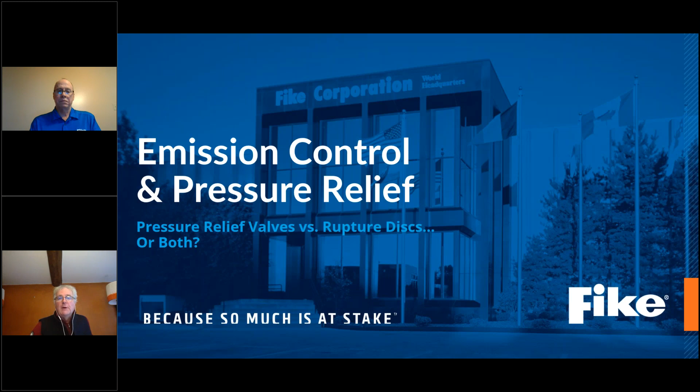A few weeks ago, we had the COP27 summit discussing the climate crisis, highlighting the need for industries to reduce their emissions of greenhouse gases. Control and reduction of emissions is now taking center stage.

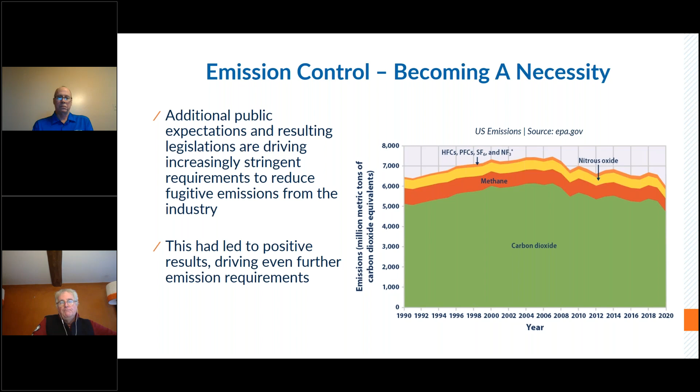In the case of the hydrocarbons and CO2 emissions, phasing out is not really an option in the short term. However, the chemical, petrochemical and process industries have a vested interest in reducing wasteful and harmful emissions from the production process, and much effort is already given to reduction.

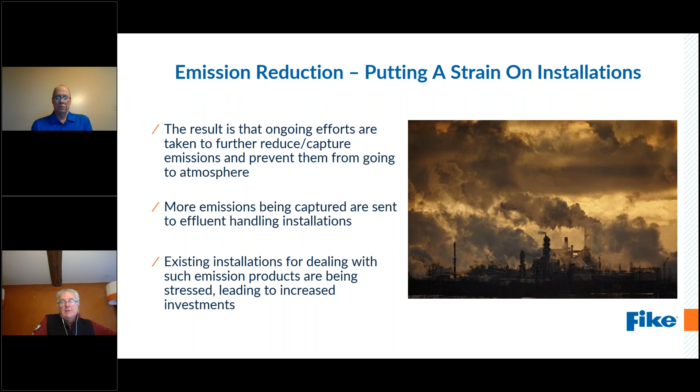Additionally, carbon capture technology is rapidly evolving. It is expensive, but the alternative is much worse. But there's no doubt that industry is taking this seriously and it's costing money. The pressure to act is coming from shareholders, lobbyists, public opinion.

Most refinery and petrochemical production processes take place at temperature and under pressure in a closed loop system. This is both to enhance the efficiency and prevent product loss. Chemical production processes are rather like an upscaled kitchen, so reactions happen more efficiently at an increased temperature, which goes hand in hand with increased pressure.

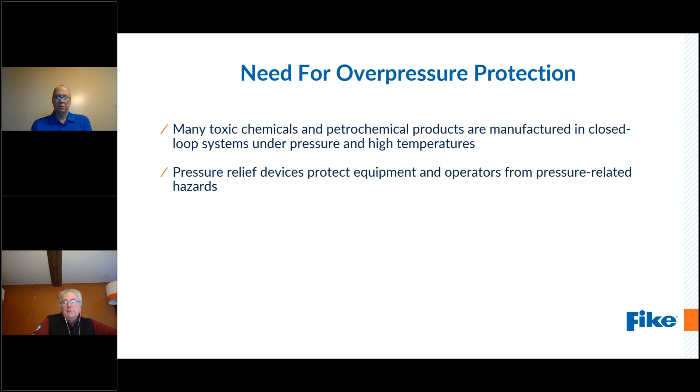There is obviously a danger from operating at high pressure in a closed system, so individuals and equipment need to be constantly protected. Whilst pressure regulating and controlling systems are very sophisticated, things can and do go wrong. So there is always a need for the ultimate safety device to be non-mechanical, able to work on its own without any human intervention or interaction.

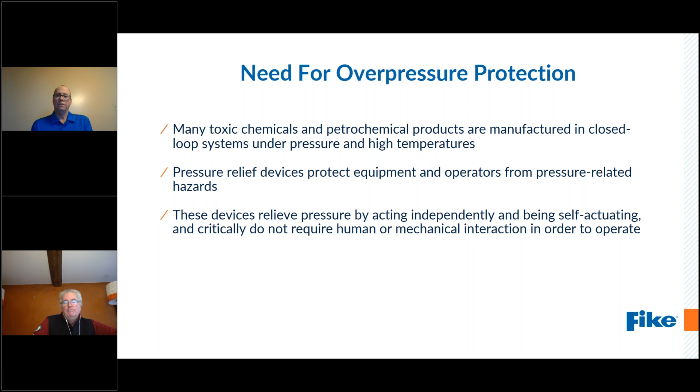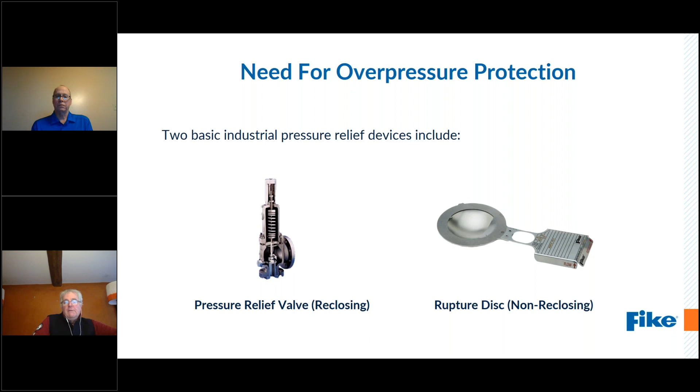If everything goes wrong - a power outage, a fire, a runaway exothermic reaction, whatever it is - something is in place to prevent that surge in pressure from destroying the whole plant. So two of the most widely used devices to offer protection in a case where the pressure has exceeded the defined safety limits are the pressure relief valve and the rupture disc.

A pressure relief valve relies on a spring to keep it closed, and it will open at a calibrated specified pressure and continue venting until the pressure subsides. The set pressure, relieving capacity and flow rate are all carefully calculated to ensure that after opening, the pressure in the system vented will not exceed a predetermined set level. This is usually the maximum allowable working pressure, known as the MAWP.

Once the pressure in the system normalizes to a safe level, the valve recloses, effectively resealing the system to prevent further loss.

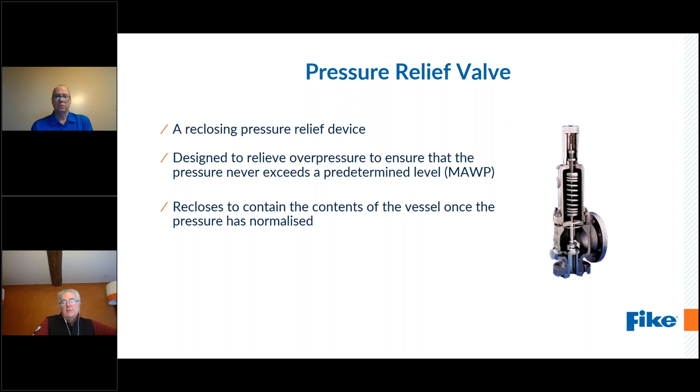But when selecting a pressure relief valve, one should consider the following. Basically, the wetted parts of the valve should be resistant to the process media. Certain processes produce product that could potentially cause blockages in the valve inlet, for example, waxes or polymers or resins.

Ongoing maintenance is required to ensure safe operation, including regular testing, removal, and recalibration if required. The initial cost of a safety relief valve, especially if it's in an exotic alloy or it's a large size, can be quite substantial. And finally, a typical metal-to-metal seal is never going to be 100% leak tight.

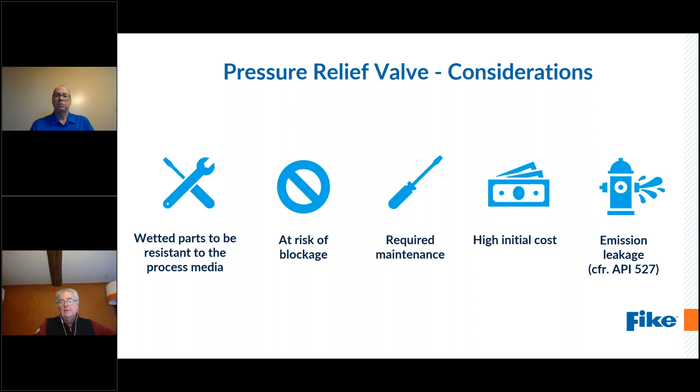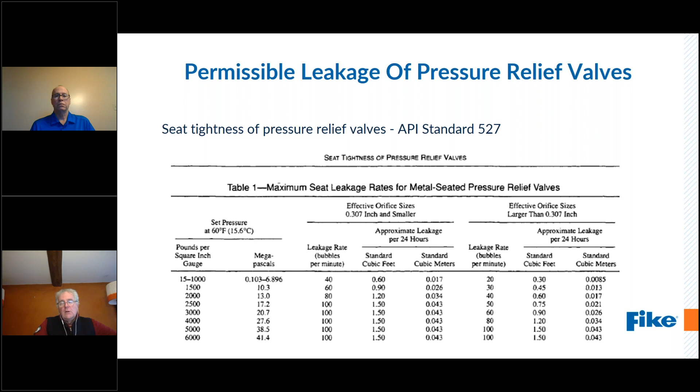The API does in fact allow it, has a table of acceptable leak rates for valves. See there - so if you see on the chart, even the most conservative case, a small low pressure relief valve is permitted to emit 40 bubbles a minute. So bear in mind that many refineries have many thousands of pressure relief valves running 24 hours a day. So total emissions can be substantial.

In addition to the pressure losses, there is the possibility for media to weep through the valve seats. This will naturally increase over time through wear and tear as the valves age. And leak rates increase as the pressure increases, especially when you get near to the set pressure and the valve actually begins to what's called chatter.

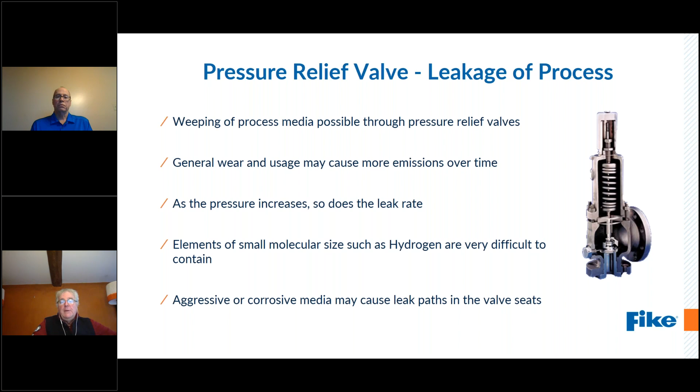Additionally, small molecular elements, such as some halides, but especially other elements such as hydrogen and helium, are extremely hard to contain due to their very small molecular size that will pass through the smallest gap. And also note that aggressive or corrosive media may actually cause a leak path.

So another widely used pressure relieving device is the rupture disc, also known as the bursting disc. Much like the safety relief valve, it is designed to burst or rupture at a predetermined pressure, and in the case of a rupture disc, at a coincident temperature.

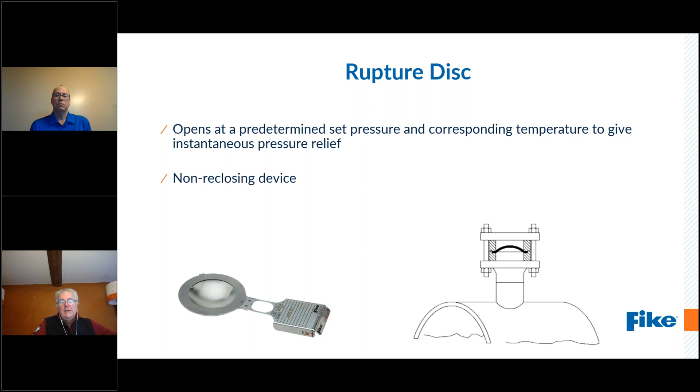It is non-reclosing. This is a fundamental difference. This is the safety valve or safety device of last resort. So basically, it breaks before the process equipment blows up. So when all other interventions have failed to stop the runaway reaction, the fire, or the continuing increase in pressure for whatever reason, the disc has to burst. But note, when it bursts, the entire pressure in the system is lost. All the contained pressure is gone, and quite possibly most of the contents. So you can imagine it a bit like a cork on a champagne bottle.

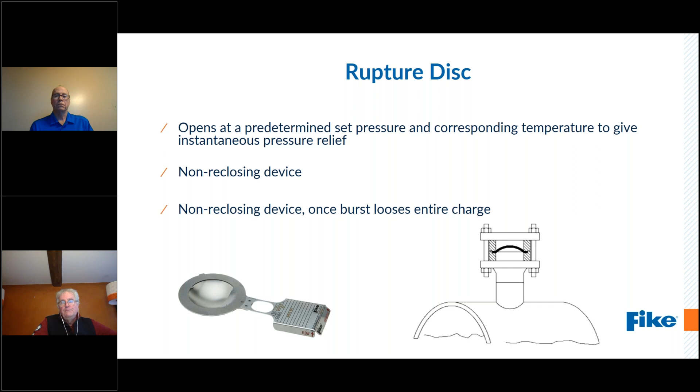It's the designed weak spot in a system. It's designed to break and relieve pressure when all other mechanical and control systems have failed.

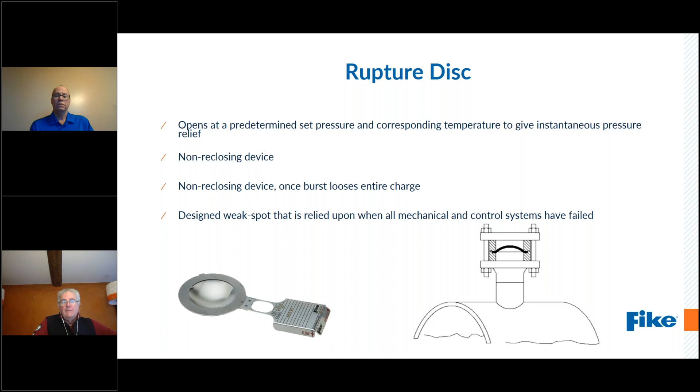So what are the attributes that we should consider? Ideally, it should be non-fragmenting, especially if there's something downstream. The idea of high pressure metal fragments flying down the system is not good.

It's possible to have a very high operating ratio with a rupture disc, up to 95% of the set pressure, according to ASME, the stamped pressure on the disc, without harm or leakage. It has a very low flow resistance, and KR values are provided by Fike to assist in system design. There's a wide range of available materials to be compatible with processes, from 316 stainless steel as a standard to Inconel, Hastelloy, all standard materials.

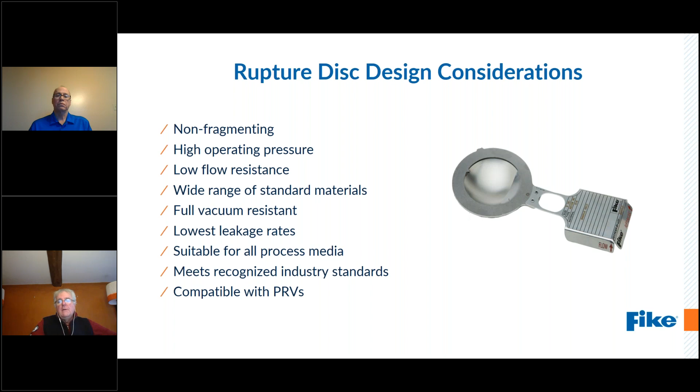You should consider is vacuum resistance important. Basically, the lowest possible level of leakage is literally bubble tight, the rupture disc. They meet all recognized standards, CE, ASME, etc., and suitable for all process media, gas, liquid, two-phase flow. And most importantly for this presentation, they're compatible for use with safety relief valves.

So as with a valve, the wetted parts should be resistant to the process media. Typically, the disc can be mounted close, even flush with the process media, so there's no inlet to plug with wax or polymeric type product.

Discs tend to be viewed as a sort of fit and forget item. So there's no ongoing services required. They're replaced when they operate, when they burst, or on major shutdowns. The initial cost of a rupture disc or a rupture disc assembly is typically a lot less than a valve, especially when exotic or chemically resistant alloys are involved or the sizes are large.

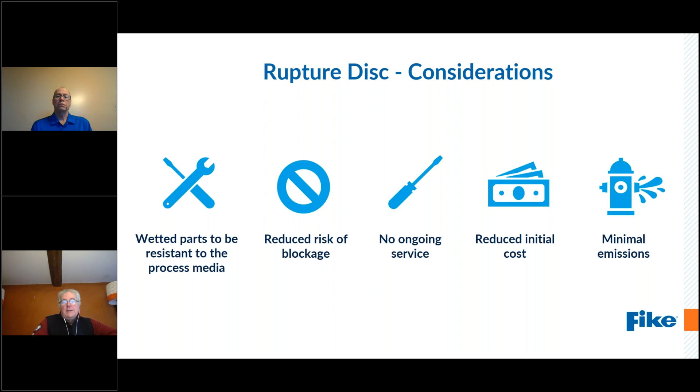Leakage and emissions are absolutely minimal, even when tested with helium. So comparing the difference between them, typically when tested with helium, a pressure relief valve might reasonably pass 100 bubbles a minute. The rupture disc, in contrast, would literally be less than a bubble a minute, and effectively none if the unit is welded. So rupture discs are used where zero leakage is vital, such as in pharma and biochem industries, where product contamination is critical.

Whilst the huge benefit of the safety relief valve is that it is reclosing. So it reseals the system after venting, thereby preventing further loss of product.

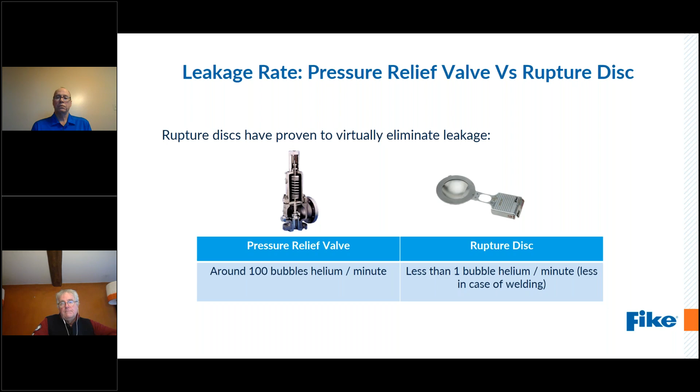So this leads to the solution. Fike's ValveGuard is one of the most widely used throughout industry, and it's a combination of a rupture disc and a pressure relief valve in series. So in reality, around 60% of rupture disc applications are to isolate safety relief valves. It's one of the most widely used disc applications. So you get the best of both worlds: leak tight and system reclosing.

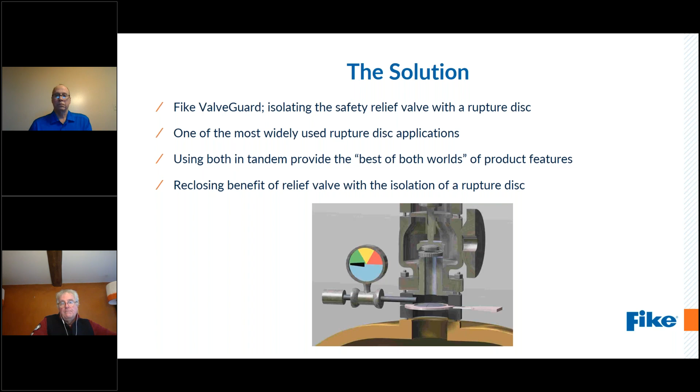As the disc sits upstream of the valve, it protects the valve, leaving it in as-new condition. Only when the dangerous set pressure is reached will the disc open and vent through the valve. This allows the process to be operated at higher pressures, even closer to the set pressure, at 95% of it, which is appreciated by valve operatives, without any weeping or chattering of the valve seat, thereby greatly reducing emissions.

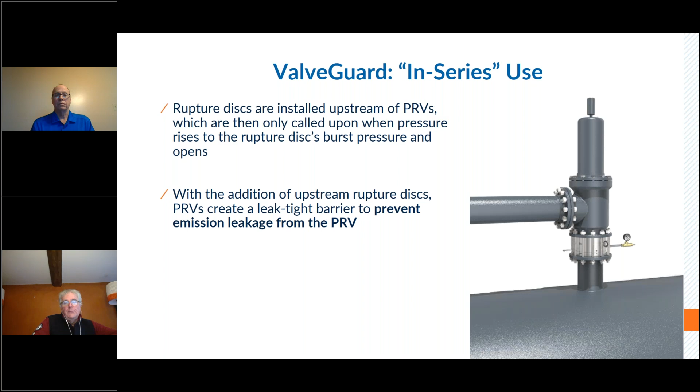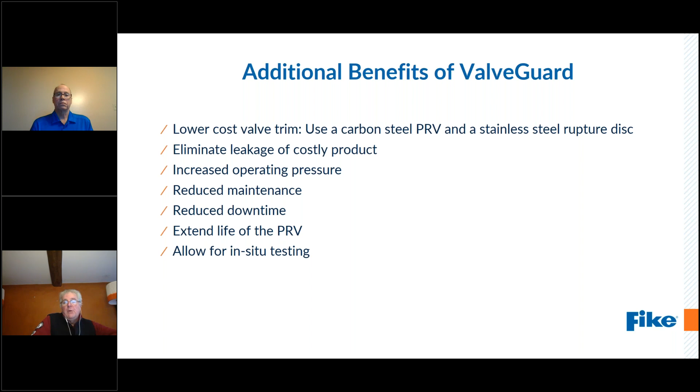So in addition to the higher operating ratios, there are additional benefits. Lower overall costs are possible. You can isolate a carbon steel valve with a stainless steel rupture disc, for example, or Hastelloy. You get reduced maintenance, reduced downtime, extended valve life, and it even allows for in situ testing of hard-to-reach PSVs, since it's possible to inject gas between the disc and the valve seat and actually pop test the valve in situ.

A typical rupture disc that Fike would recommend for isolating a safety relief valve would be one of the latest G2 developments, the Axius RD520, or Atlas RD500 for higher pressures. Since these precision non-fragmenting rupture discs allow for a genuine operating ratio of 95% of the stamped burst pressure, according to ASME, or 100% of the minimum performance tolerance as specified by PD ISO 4126, they have an extremely high resistance level to pressure cycles and pulsations. The holder heights themselves can be adapted to guarantee clearance to the valve seats.

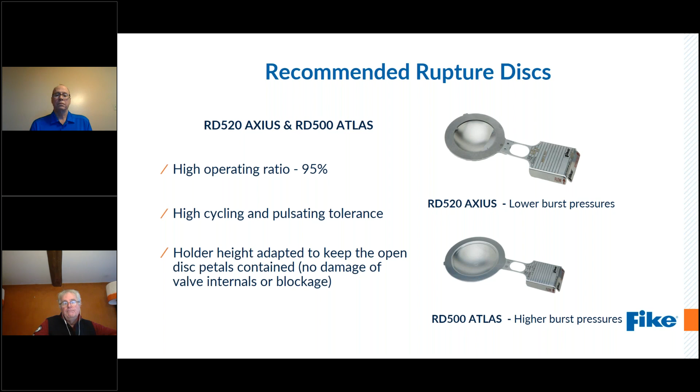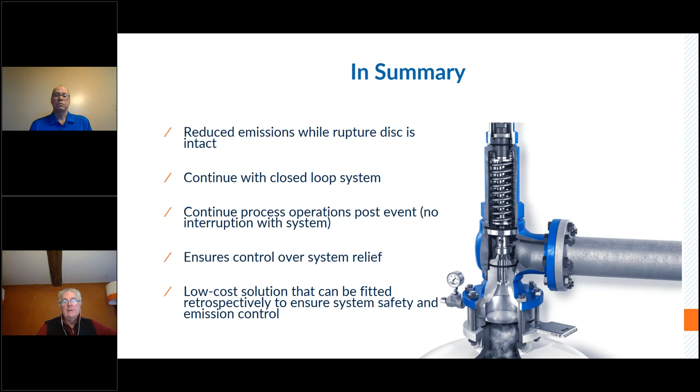So in summary, the safety relief valve will eliminate emissions whilst the disc is intact. The system pressure is contained after returning to the pressure norms. The process can continue until a controlled shutdown allows the disc to be replaced. Control over the system is maintained at all times. It's a relatively low-cost solution to the problem of media loss through leakage that can be retrofitted onto existing leaking valves.

So this is a nice cutaway that you can see the location of the rupture disc and clearly understand the concept of isolating the valve.